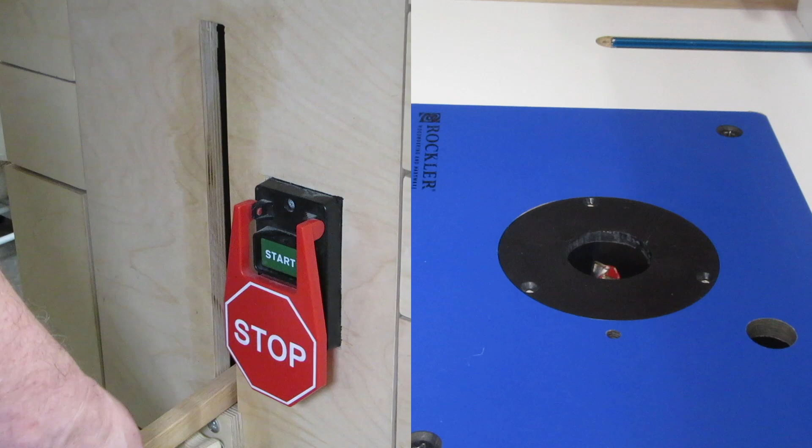Hey, Newbie Dan here. I posted a video a couple of days ago showing my DIY router lift for my plunge router. Some people asked if it would only work for plunge routers or if it could be modified for fixed routers. Not only can it work with fixed routers, but there's actually some advantages to using a fixed router instead of a plunge router. Stick around and I'll show you all about it.

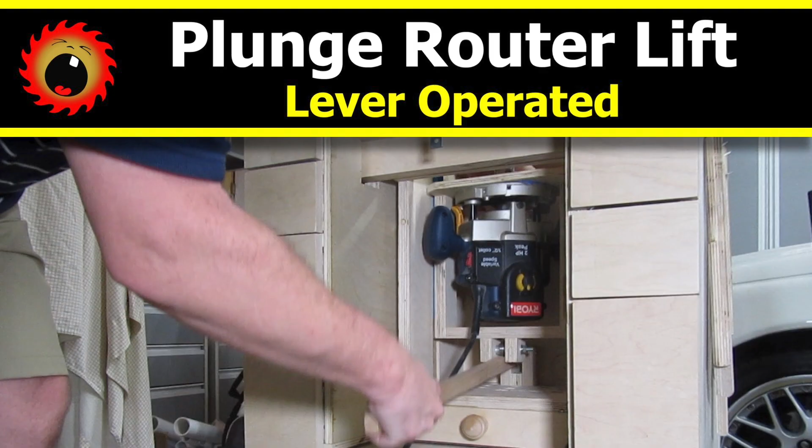Make sure you watch my video on the plunge router lift first, or this video may not make a lot of sense. I haven't actually built this lift for fixed routers, but as you'll see, most of the lift is the same, so it should work just fine. For plunge routers, the carriage has a top panel that you attach your router to. For fixed routers, don't use the top.

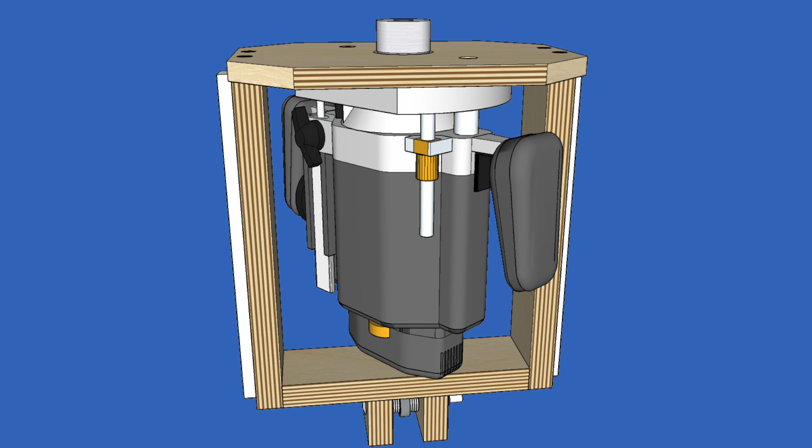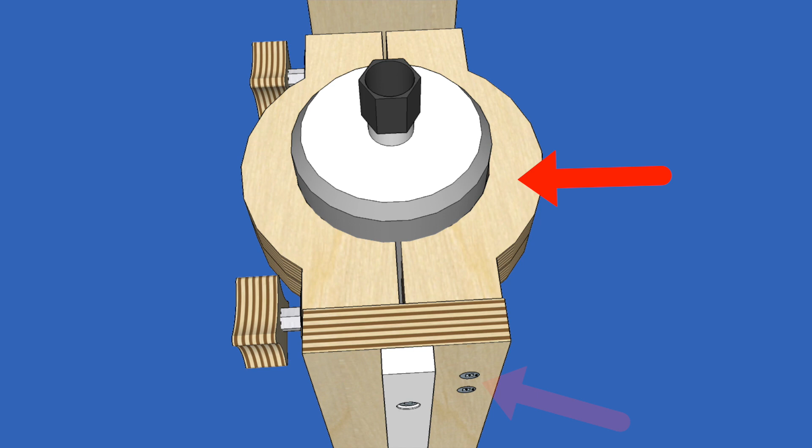Instead, use a clamp. This is a typical clamping mechanism you see in a lot of DIY router lifts. It's two pieces of 3/4 inch plywood glued together, with a hole in the middle, cut into two pieces, and cut to your preferred shape. Carriage bolts and knobs are used to clamp the router in. You only attach the back of the clamp to the carriage sides, so the front can move freely as you tighten or loosen the knobs.

One of the advantages of using a fixed router is you probably won't need a collet extension. With no top panel, the collet should be easily accessible from the top. In fact, you can probably pull the carriage right out of the table through the hole in the top. Of course, it all depends on your specific router and table.

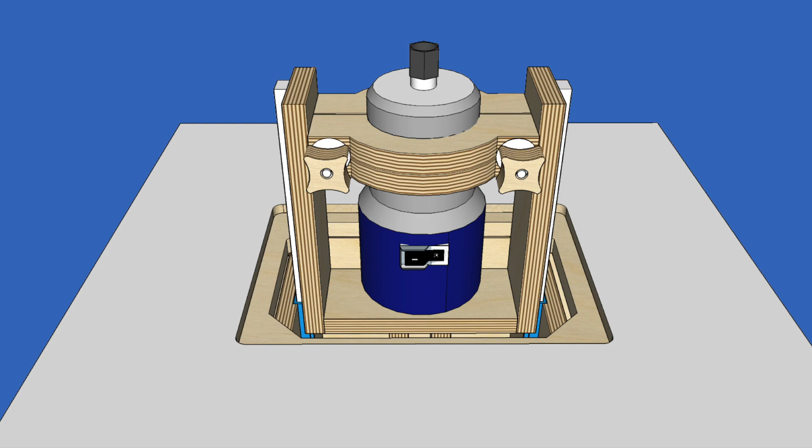I uploaded a new SketchUp model for this version called Fixed Router Lift with Lever, so be sure to check it out for more information. Keep your eyes open for an announcement about a possible build video. For now, I wanted to get this out quickly to answer some questions.